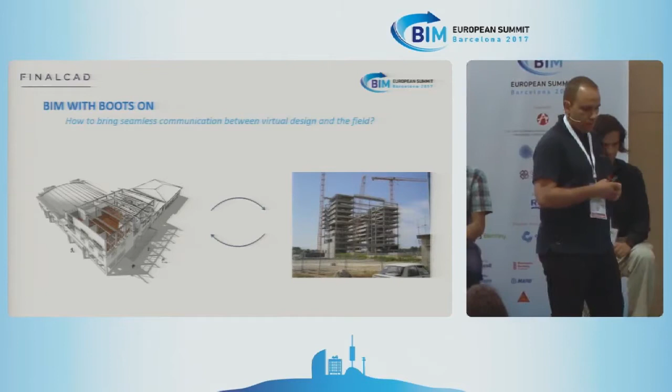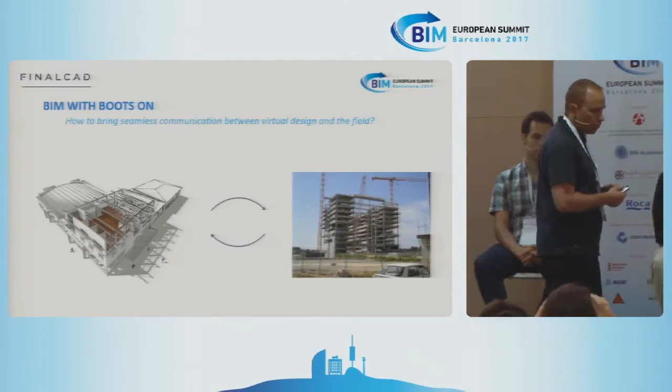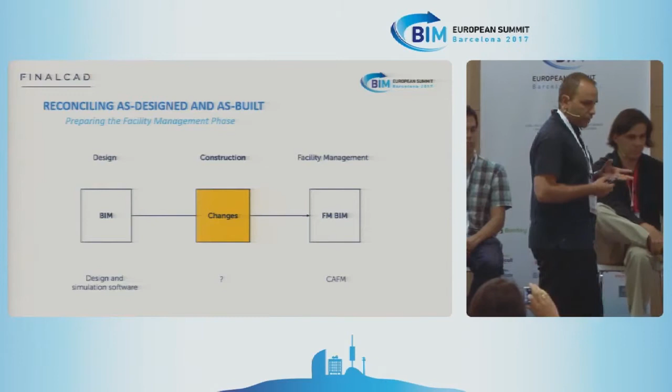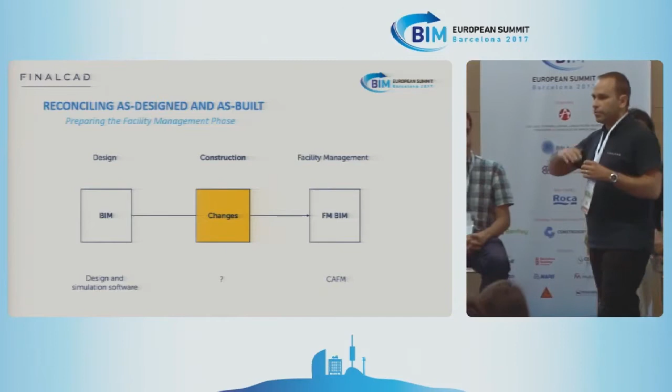So what I want to share with you today is a few rules that we've applied to ourselves to make sure that BIM can be used by anyone, in a way that is so simple. So the whole question is how to bring this virtual model that has been designed to the field. Why is it interesting? Because to avoid this digital divide between the design and the construction: you might have a beautiful design in the BIM model in the design phase, but if you go back to paper blueprints in the construction phase, almost everything is lost.

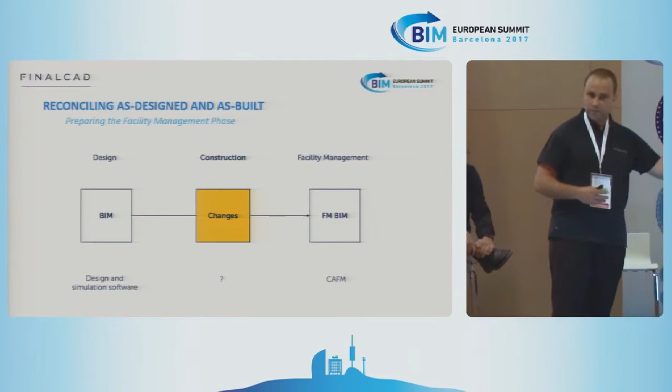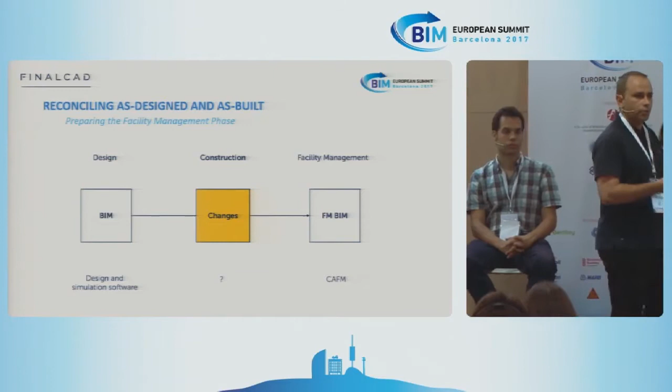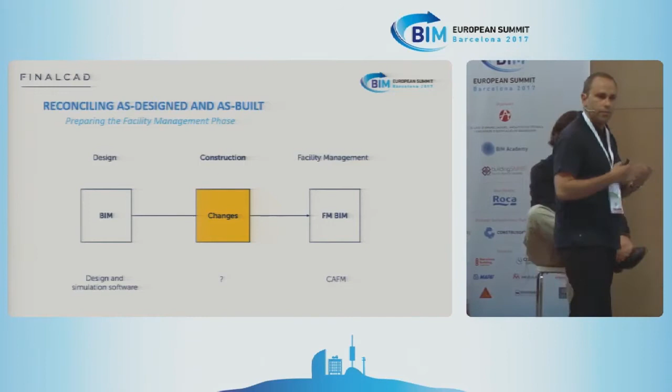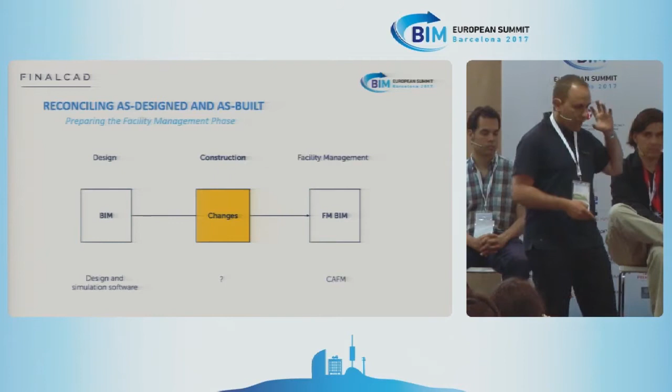And then there's another divide between the construction phase and the facility management when there is no data of the asset. There's no history. The contractor, the only thing he thinks about is his next project. And the facility manager has to find out where it is leaking, where it is breaking, and there's no traceability, there's no history. So taking the opportunity of the construction phase, which is in the middle, to track the changes is very key to have a consistent virtual twin, digital twin, if you prefer, all along the stages.

So rule number one is we focus on the job. There's a lot of applications on the market for BIM on tablets or smartphones. The problem is that they bring the whole model. So it's great for architects because the architect knows his own baby, he knows how to play with the project and everything, but for people on the field, this is way too complicated.

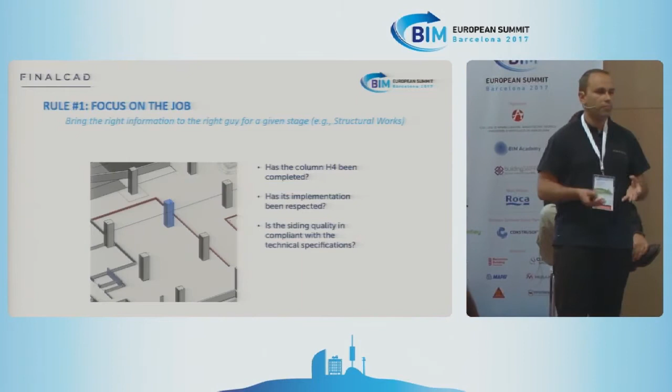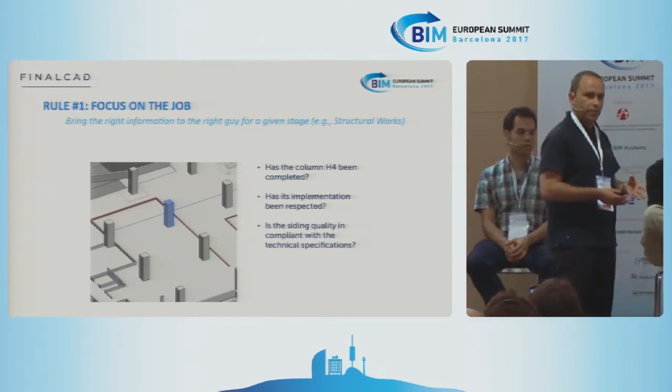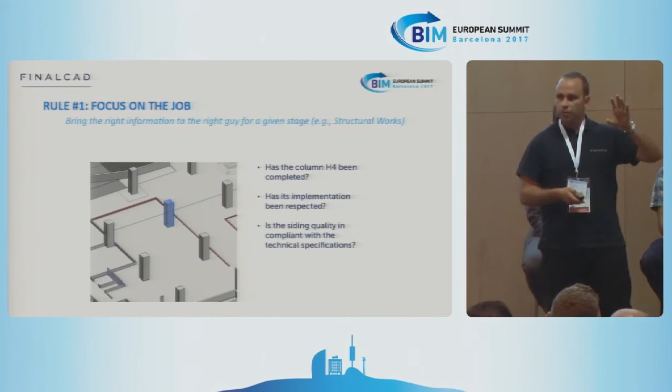So what we do is we pre-filter, we pre-select elements of interest for a given phase, for a given stakeholder at a given time. So for instance, here for structural work, let's assume we have to do quality control on those pillars. We will select the pillars one by one for them to be able to do the quality control with the right questions, like is it compliant, has the implementation been respected, are the dimensions okay, is the material okay, and so on.

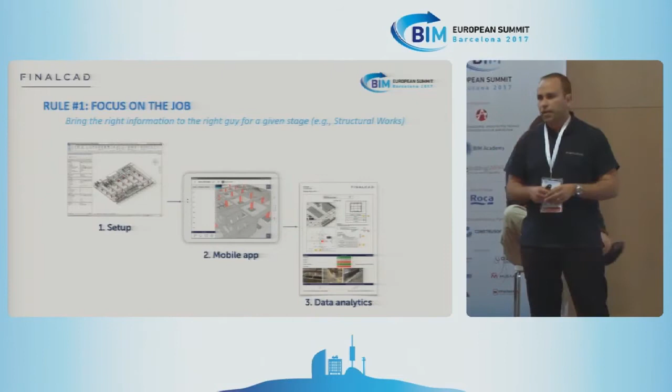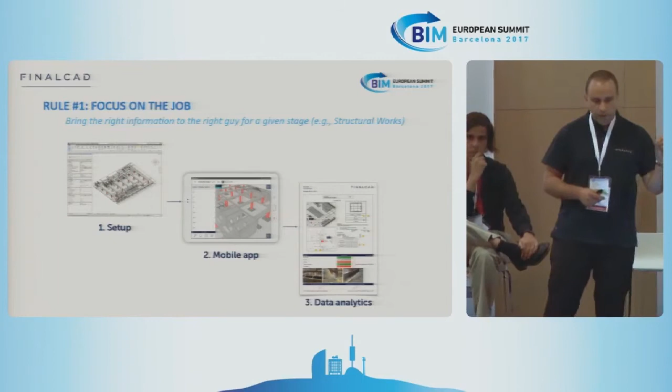So the way we do that, we've developed plugins on Revit that will automatically select all the objects and create the associated quality control or progress monitoring processes that can be used directly on the mobile app, and then that can generate data analytics and reports.

Rule number two is to use metaphors. If we look at the way people are using paper blueprints today, a common way to follow the progress is to use those Stabilo Boss pens, with red when it's not compliant, green when it's done, or yellow when it's in progress. We did the same thing on a BIM model.

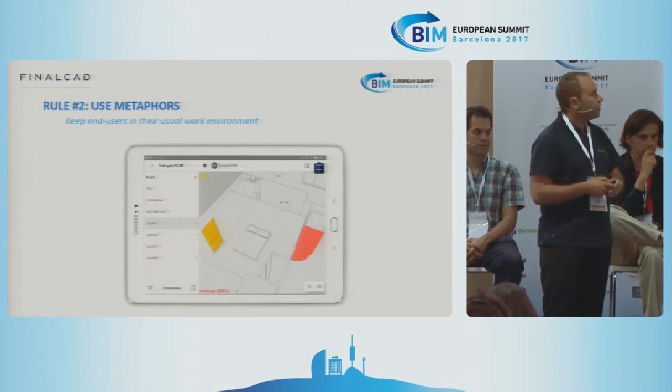So on a BIM model, you can follow the quality control, or you can follow the progress using the same metaphor as a Stabilo on the blueprint, except that it's on the BIM model directly, and of course you can generate reports in the same way. And of course, all of this is sent back to the BIM model, back to the office, where the BIM manager can follow over time and reconcile as-built with as-designed.

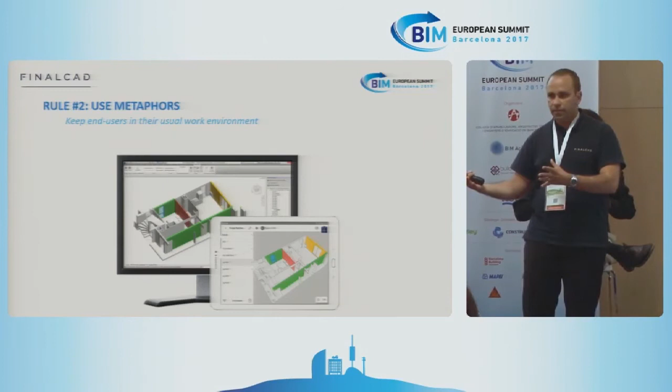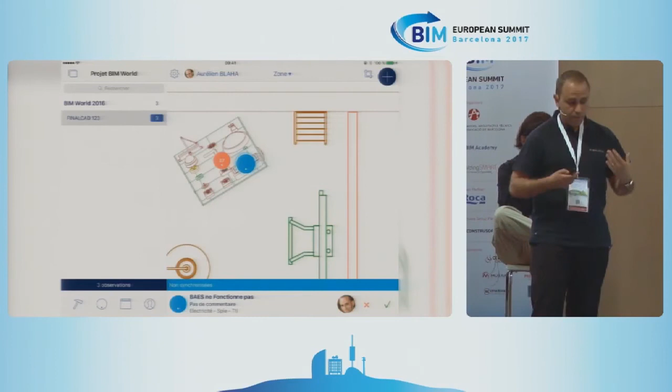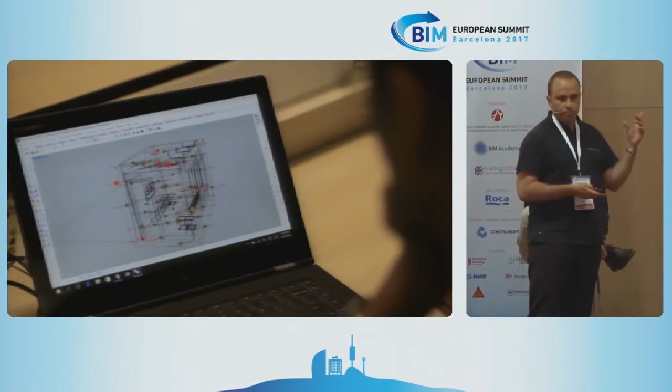And the last example is, instead of having the defects on a blueprint or a BIM model, we developed with Google Tango technology, which is an infrared technology, and Flux.io, an app where you can directly see with augmented reality and put the defects that you're spotting directly within the app. So from there, you don't even need to know how to read a drawing or a BIM model. You just point where the defects are. I don't see what we could do more simple than that. And of course this goes back to the BIM model. So really make sure that this is as easy to use as it can be.

So are you ready to put boots on BIM? As we say, we use Waze to drive today, and tomorrow we'll use Finalcad to build.